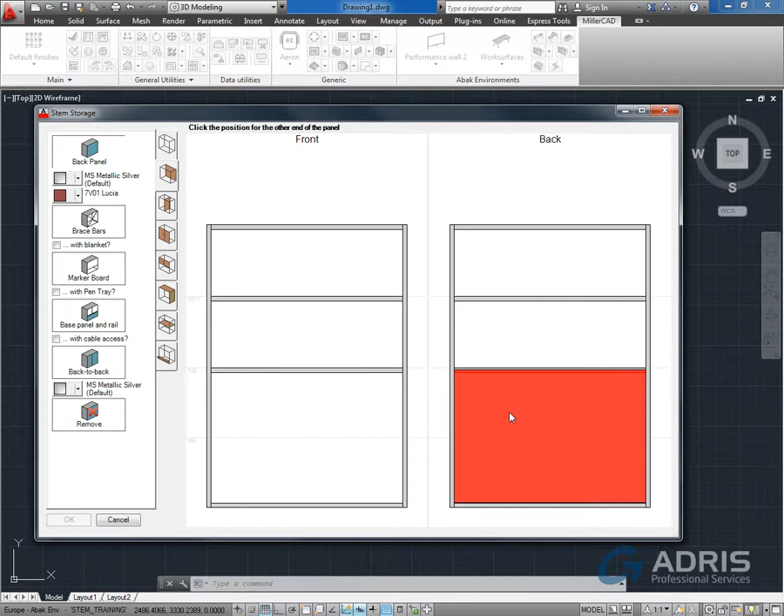To allow stem units to be used in a spine wall arrangement, there are generally no rules to say that back panels have to go on the back or that doors have to go on the front. But once you've added something to a space, it will fix the orientation of that space and prevent you from adding something similar on the other side. So for instance, I could put a back panel higher up on the front.

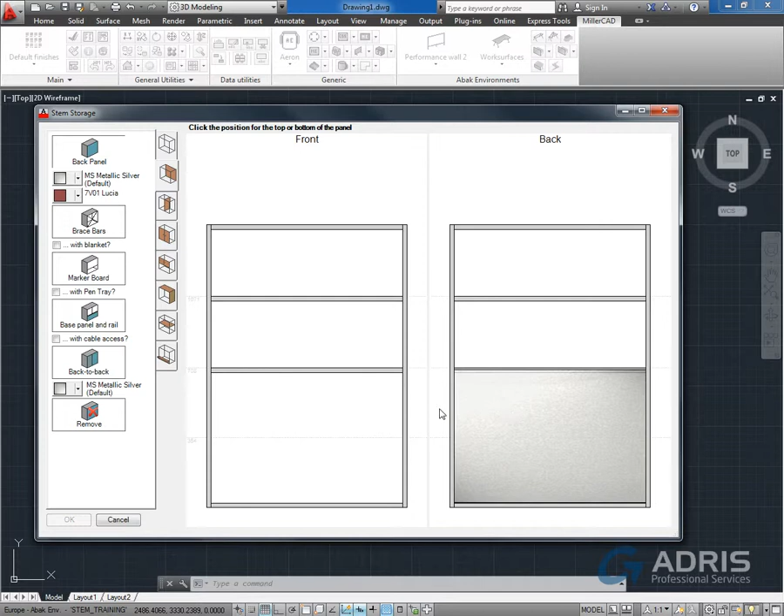Now I could extend this back panel up or down. But I want a one module panel, so I click in the same place again. Note that the first back panel is metallic silver because it is on the floor and therefore full height, so its finish comes from the first finish button. This back panel is not full height, so its finish comes from the second finish button, which is fabric.

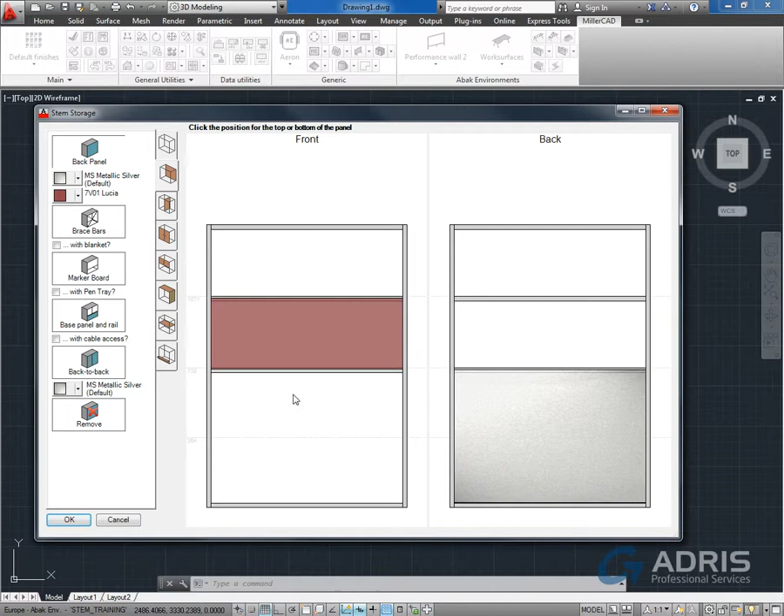Now let's put in a door. Here you can see hinged doors and locker doors, each with their own finish button. With doors, you simply need to click in the space where you want a door.

Now centre panels. The program treats centre panels and shelves as dividers which divide a space into smaller spaces. You need to consider the order that you put shelves and centre panels in to get a particular configuration. Let's clear this unit to see some examples.

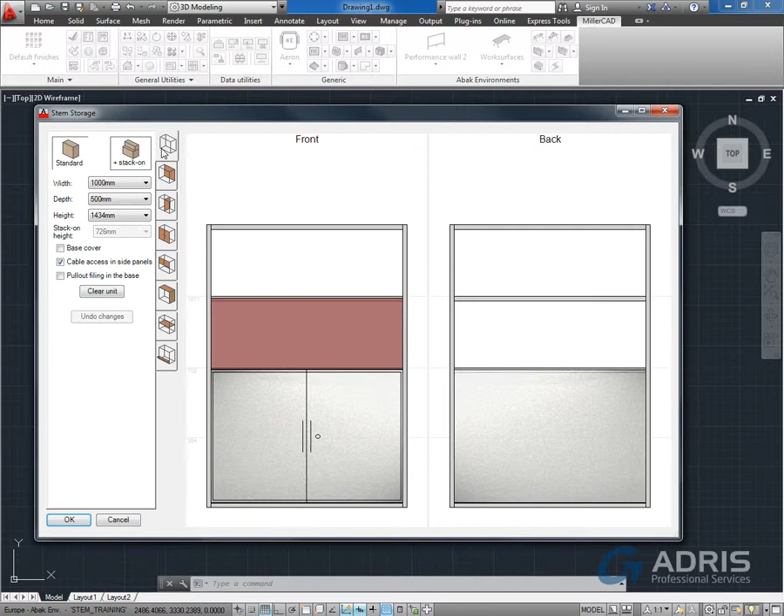If you put a centre panel in first, shelves you put in afterwards will be half width on one side or the other. If you put a shelf in first, a centre panel you put in afterwards will not be full height.

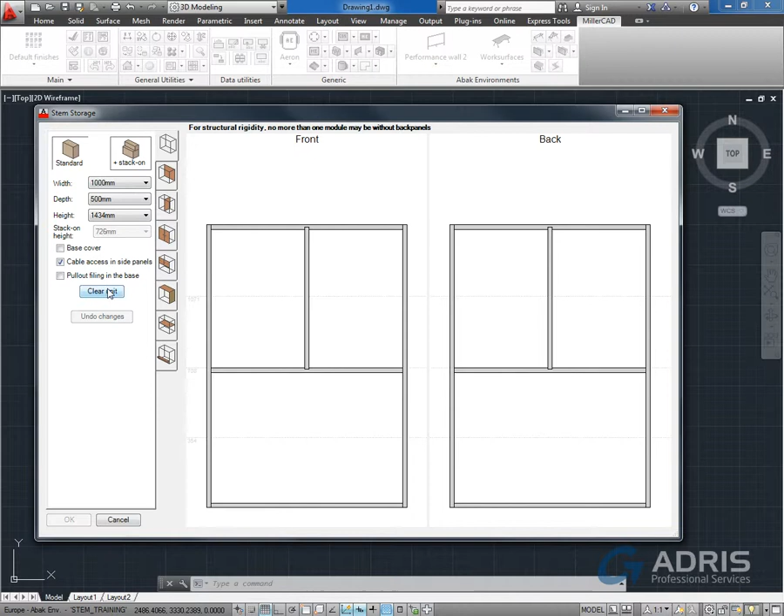Also, bear in mind that if the unit is 1200mm wide, and only in that case, two centre panels can be used to split the width into thirds. Let's see an example of that. With 1200mm wide, if you click close to the middle, the centre panel will be added centrally. Otherwise, click to one side or the other to split the width into thirds.

Then if we wanted, we could add a two-thirds wide shelf. And one of these new spaces can have another centre panel.

When a divider, either a centre panel or shelf, is removed, you may have to choose whether to keep the arrangement on one side or the other. For example...

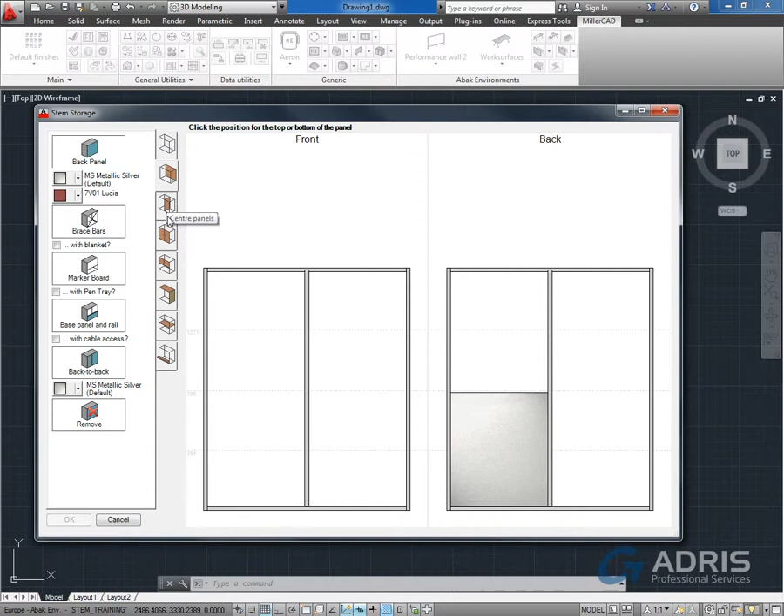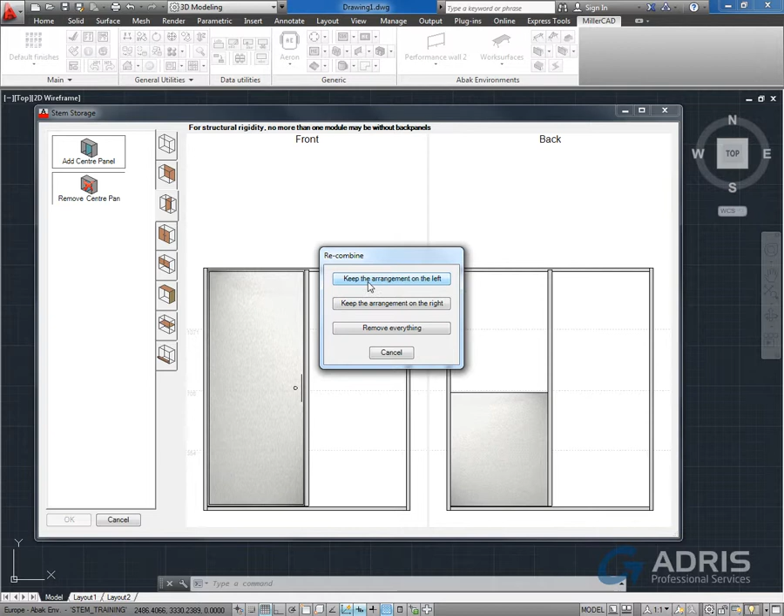In this case, if we remove the centre panel, on the left is a door but no back panel, and on the right is a back panel but no door. If we keep one arrangement or the other, it will apply to the whole unit. So let's keep the door on the left. As you can see, this becomes double doors with no back panel. The content of the arrangement also includes any shelves on each side.

A similar question may appear when removing shelves, with above and below instead of left and right. Because they work slightly differently, let's look at the sliding doors.

The mono sliding door runs on grooves on special wooden shelves and must be above 708mm work surface height, so we need to make the unit a little taller.

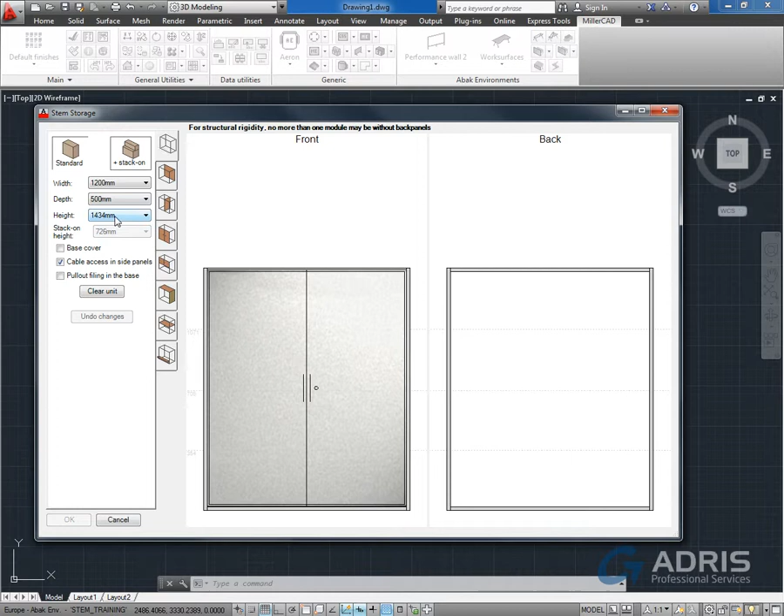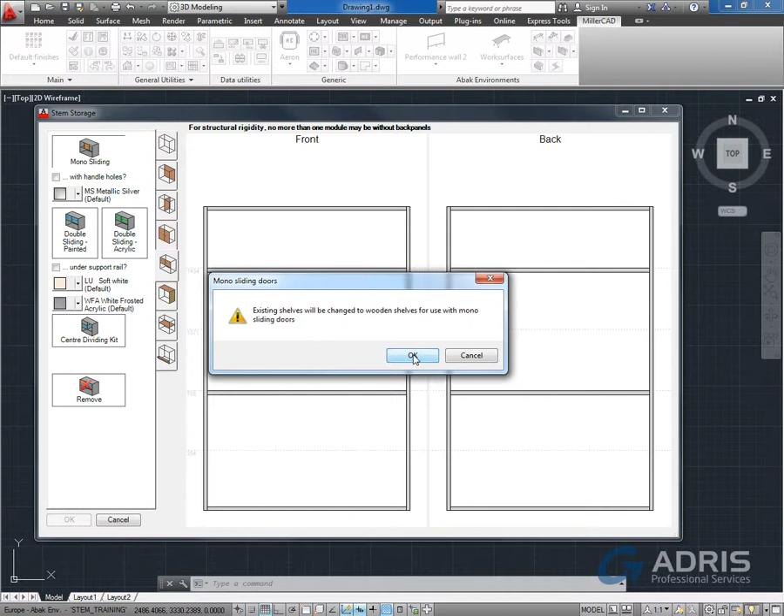You can't add the special shelves directly, so in fact we can put in any type of shelf. You need to pick between the two shelves. It warns you that the shelves will be changed. As long as the space above the one you pick is not already taken up by something else, you will have the option of a sliding door which is one module taller and extends into the space above.

Notice that the shelves now look wooden. If we remove the mono sliding door, the shelves are converted back to normal metal shelves.

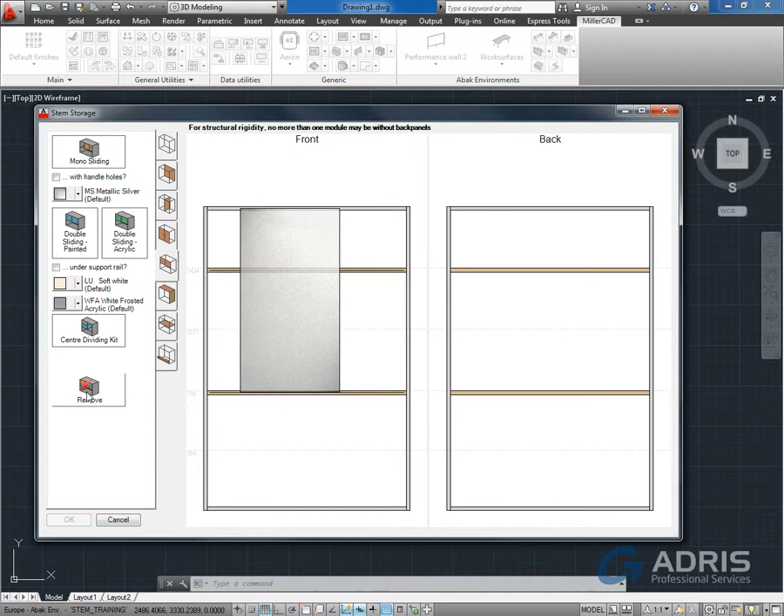Double sliding doors have the under support rail option. When that is not ticked, you could put sliding doors anywhere. With under support rail ticked, the doors have to go in the bottom two modules, and MillerCAD will put in the support rail and the sliding doors together.

The centre dividing kit is a Z-shaped item that divides a space into two, so that one half is open to one side of the unit and the other half is open to the other side. From either side, as you look at it, the right-hand half of the space will be open.

The centre dividing kit can be used on its own, but it can also be used with a set of double sliding doors. In that case, one door will be used on each side, so that you can slide it across to close the open half.

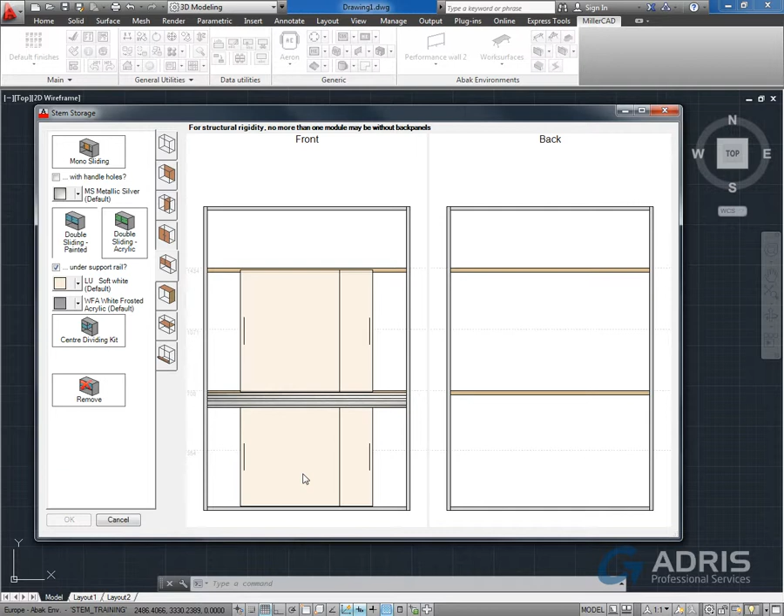So, if we add a centre dividing kit between our two shelves, it asks us if that's what we want to do. And you can see that one door gets moved to the back.

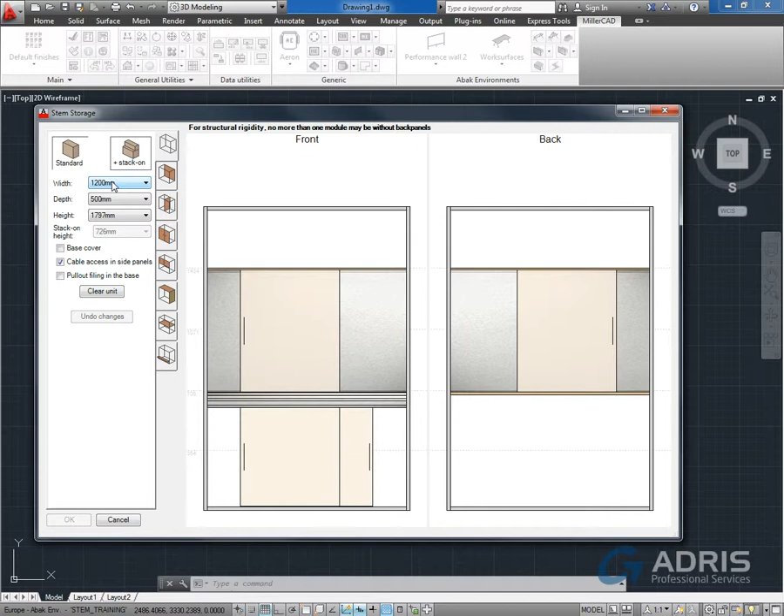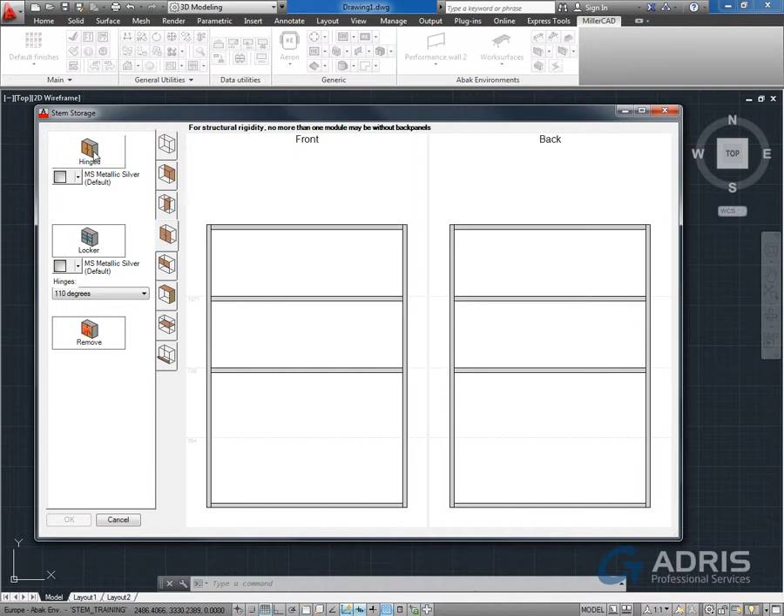Now let's do a simple arrangement to insert into the drawing. We'll have two shelves, hinged doors at the bottom, sliding doors at the top, and a back panel covering the whole of the back.

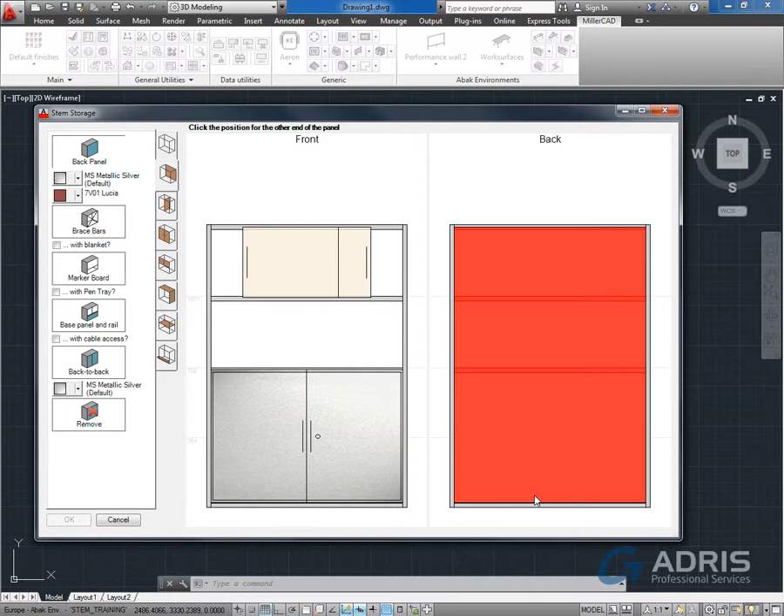Most of the items that make up this unit will be constructed into a single block that can be inserted into the drawing. The only exception is the worktops.

If you position two units of the same height back to back, a larger worktop can be ordered that will cover both. If that's what you want, using a full-size back panel, as we have here, would be wasteful because the two back panels would be facing each other.

There is a back-to-back panel for that purpose. The back-to-back panel product actually comes in two halves, and in MillerCAD one half is included in each unit, so you don't need to remember to specify the back-to-back panel for both units.

Now we are ready to insert this unit into the drawing. You can pick the side or the back of an existing unit. Because this is our first unit, I'll press return. Then pick where the unit should go.

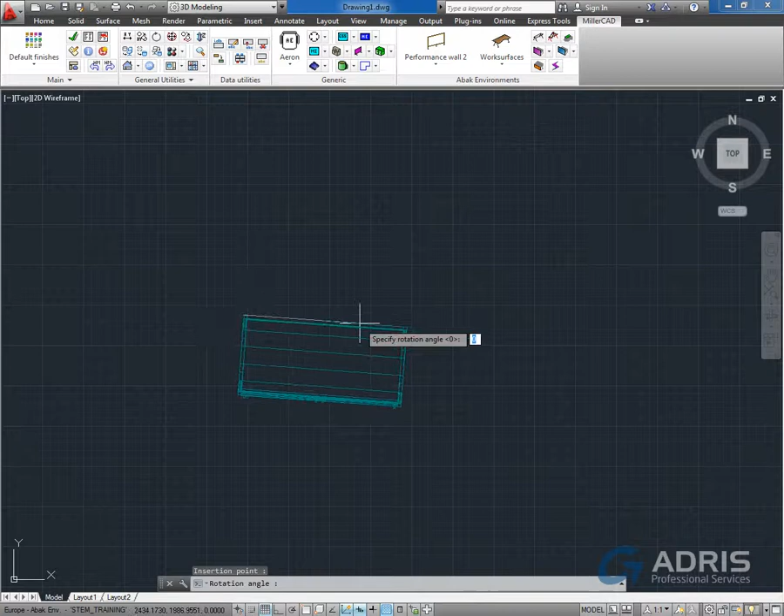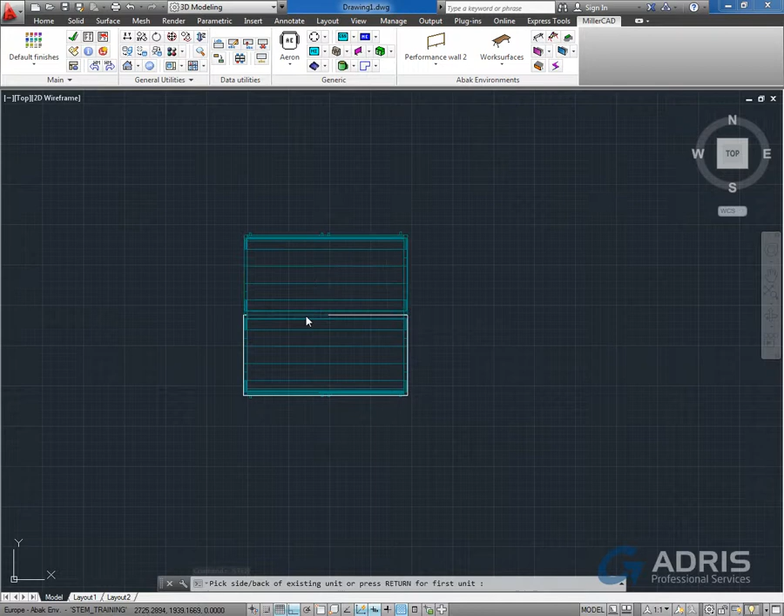Now, if we repeat the command, the dialog box starts with the same arrangement, which is what we want, so I can just click OK. And now I'm going to pick the back of the first unit. It's asking us if we would like to use the larger worktop, which we would.

If we want to change something about one of the units, there is the Edit Stem Unit command. Let's select the first unit we put in. It uses the same dialog, starting with the arrangement of the unit that you pick.

One difference is the Undo Changes button. If you change your mind while editing the unit, you can click the Undo Changes button to reset the dialog to the arrangement you started with.

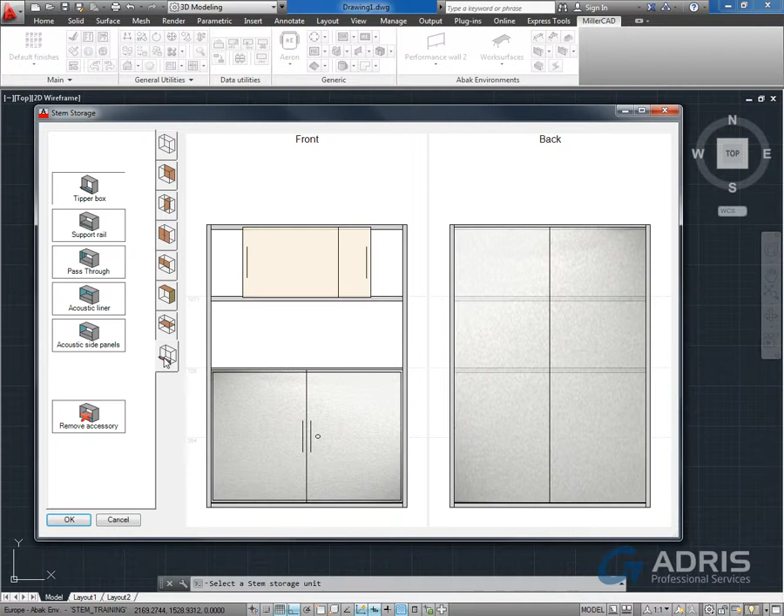In this case, I want to attach a work surface to the unit, so we need a support rail. At the moment, only Abak Environments work surfaces can attach to the support rails. We simply select the support rail, then click on those lower doors that need to be replaced, and click OK.

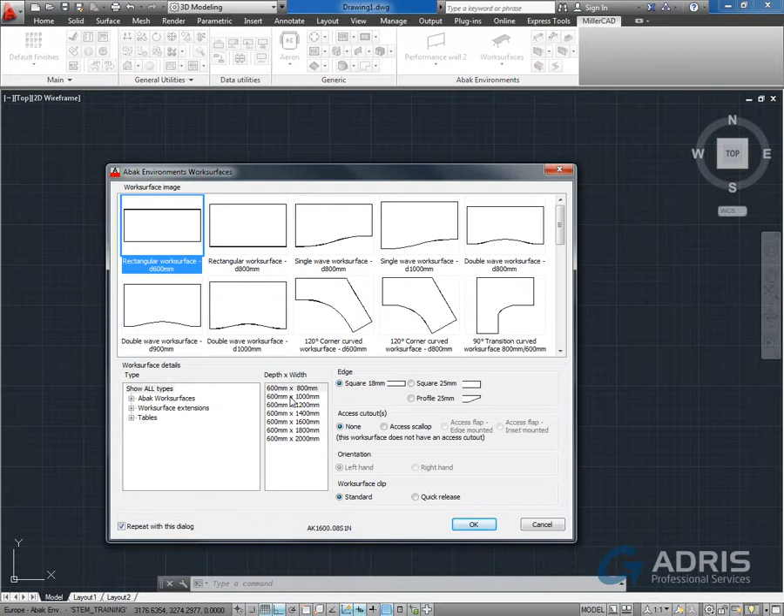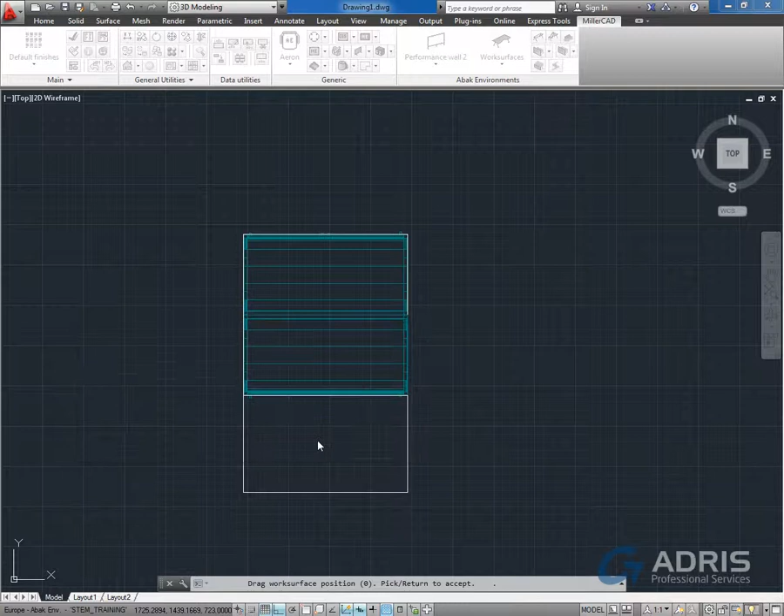Now we can add our work surface. Now we can click on the front of our first unit where the support rail is. Then choose the style of leg as you normally would, and the legs will include the clamp which attaches it to the support rail.